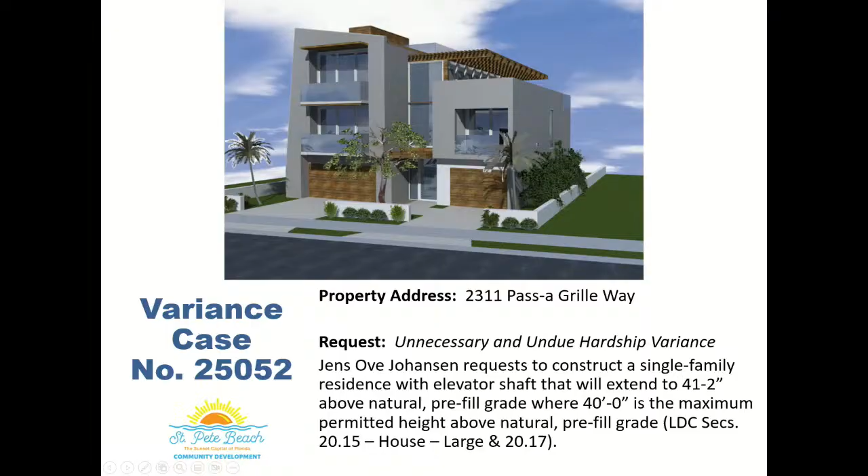Okay, thank you. Good afternoon, Brandon Berry, planner. Pull up the PowerPoint. This is variance case 25052 for the property address of 2311 Pass-A-Grille Way. It is an unnecessary and undue hardship variance. Jens Johansen, the owner, requests to construct a single-family residence with an elevator shaft that will extend to 41 feet, 2 inches above natural pre-fill grade, where 40 feet is the maximum permitted height above natural pre-fill grade. This is a variance from Land Development Code sections 20.15 house large standards and 20.17. Here's a listing of exhibits.

Here's an aerial of the property. It's located at the southern end of a residential strip, just north of the St. Pete Yacht Club. The parcel to the south previously contained a residence back in 2018 or 2019. It was demolished and became an extension of the parking lot for the St. Pete Yacht Club.

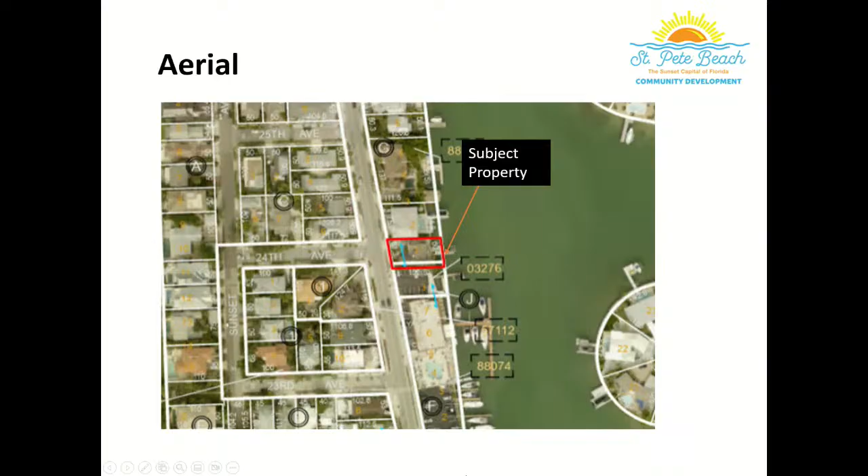The property has a zoning of RU2 PAG. This is a detached single-family residential zoning, which is what the applicant is proposing. They're not seeking any variance to the use standards. It is just north of the institutional district.

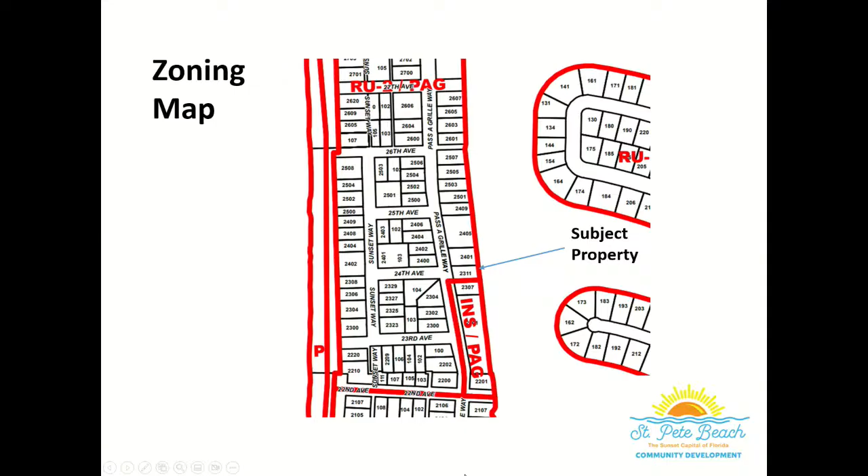Going into details on this request, and I'll show this in more detail on the elevation, the applicant is not requesting a variance to the height of the primary roof line of the residence. They're seeking a variance to add fill to the lot and allow for the overall height of the residence, based on pre-fill measurements, to exceed the allowable height for the elevator shaft overrun.

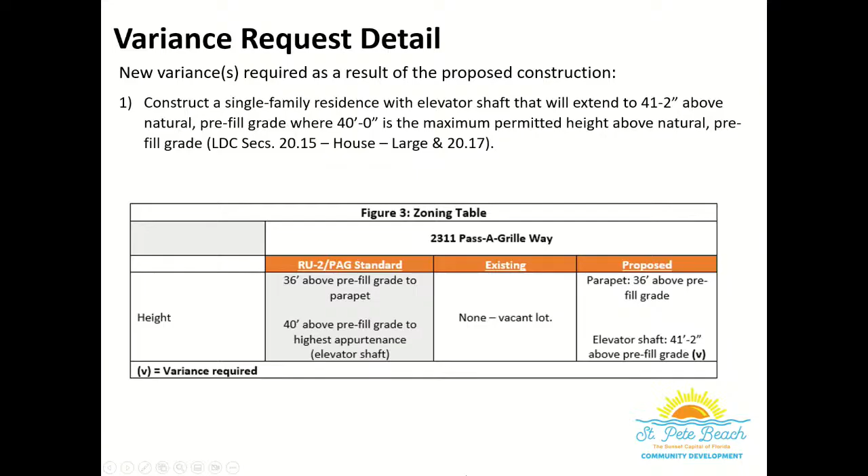That'll be more clear when I show the elevation. They're not seeking any kind of variance to the overall allowable height of the home, even measured from pre-fill grade. It does meet the required measurement. It is only an elevator shaft overrun of 1 foot 2 inches that they are seeking this variance to.

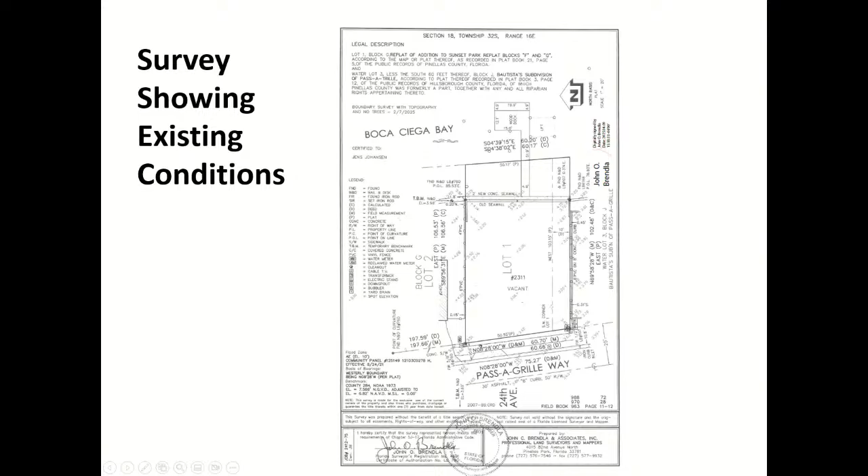Here's a survey showing existing conditions. This is associated with the new residence. You can see the existing lot grade and the existing condition of the lot on the screen.

Here's a rendering showing the front elevation. This was shared with the Historic Preservation Board last year. It did go through the required design review. The applicant has made a few minor modifications to address staff comments and other comments that were shared at that meeting.

From the existing grade prior to fill, this home does meet the required height. However, because they are adding in that additional 1 foot and 1/3, the elevator shaft enclosure is now exceeding that measurement that would be allowed by 1 foot 2 inches. So only for the elevator shaft, they are seeking a variance relative to the pre-established grade.

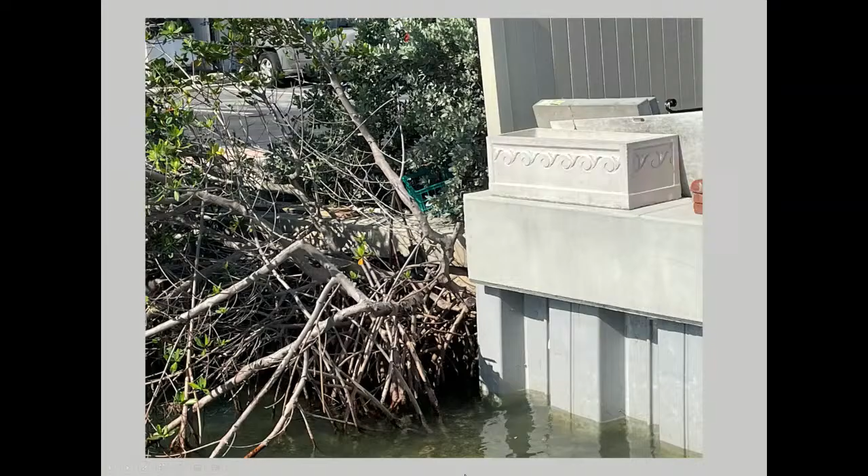To summarize staff findings, as I mentioned before, only the elevator shaft overrun requires a variance. The primary home's roof, the top of the parapet, does comply with the grade change proposed. So even with that 1 foot 2 inch difference taken into account, it does still comply with the maximum height for the lot based on the pre-fill grade.

The applicant has graded their lot to 6 foot NAVD 88 to allow for adequate lot drainage relative to the new code compliant seawall, which, as I mentioned before, is established at 5 feet. This is a unique circumstance. It's one of the first code compliant seawalls along Pass-A-Grille Way and one of the first to be established prior to new development.

A recommended slope of 1 to 2% across the lot to provide adequate drainage on site does justify the 6 foot NAVD 88 measurement of the lot grade relative to the 5 foot seawall. So looking at the grade change across the site with a 1 to 2% grade differential across the site, that does justify a 6-foot grade height.

The applicant is not building a taller home from grade than what would be permitted if they did not grade up the lot to compensate for the seawall. The grade change causes the need for this variance. If they had built this same home at the same height at 4.67 feet, as was the prior established grade, they would not need any variances at all.

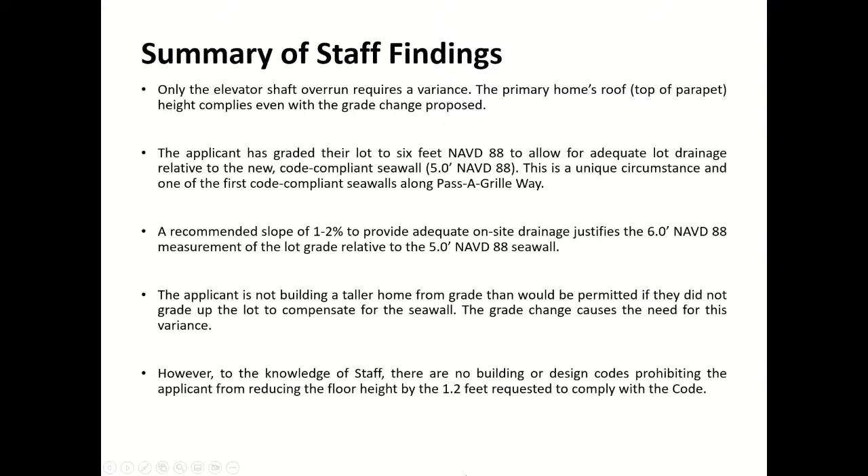The applicant should be prepared to provide their own testimony and respond to staff comments on whether the elevator shaft overrun is the minimum necessary to meet rooftop access requirements, and/or state the need for the floor height of the living or ground floor level. The applicant should also provide testimony on any alternative plans developed should the variance not be granted.

Effectively, how would they develop the home should this variance not be granted today? Staff has not proposed any conditions. There are motion options to approve the case as proposed, to deny the case, or to continue the case to a date certain if more information is needed. We'd be happy to take any questions. The owner and the applicant are present.

I have no questions. I have a question. Do elevators come in standard sizes, or are they custom made for each house? I believe this is custom made for the house, but the applicant has stated there is a minimum overrun of the elevator shaft relative to where they established the top level that would require that overrun.

But they can confirm that. Any other questions? Brandon, I've got a question for you. So just with an eye toward not having this come back as more seawalls get fixed, can you explain to me the height current limitation, what is the datum for that?

And then is that datum, why isn't that different? Does it need to be changed for the future based on the newer seawall height? Because everything's going to get backfilled as the seawall heights come up for all the lots. So the impact is going to be largely on those developments that are built to the absolute maximum height allowed in this district.

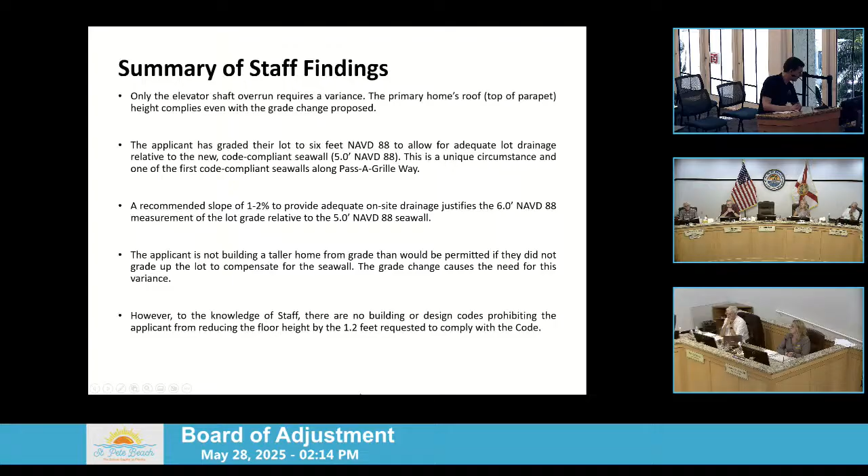Brandon, can you pull up that proposed front elevation page? I know it's really small, but when I was looking at it in the packet, does it show the garage level is 8, the next living level is 9, and the highest living level is 10? Correct. The highest living level is 10, the level below that is 9, and the level below that is 8, correct?

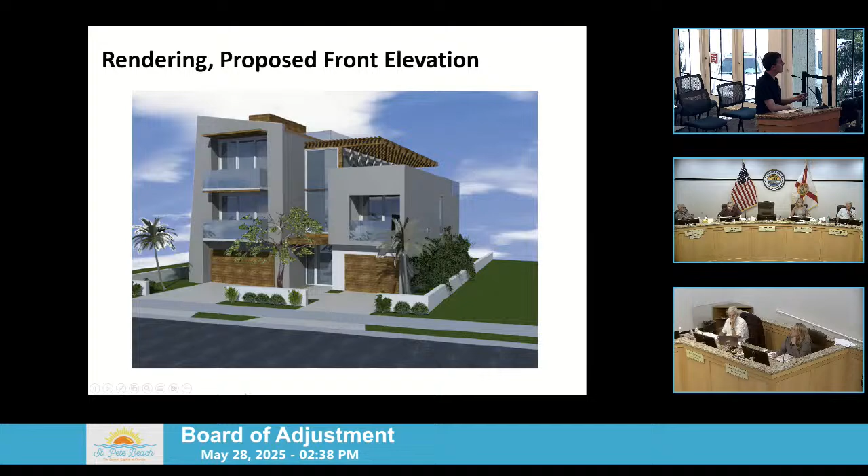So as I look at it, the left side of that, is the roof, that, whatever that is on top, is that sort of slanting down or up? Correct, that's a parapet. That's part of the roof design, but that portion of the structure complies with the parapet maximum height, even with the 14 inches of difference. So that is compliant, they're not asking for a variance for that.

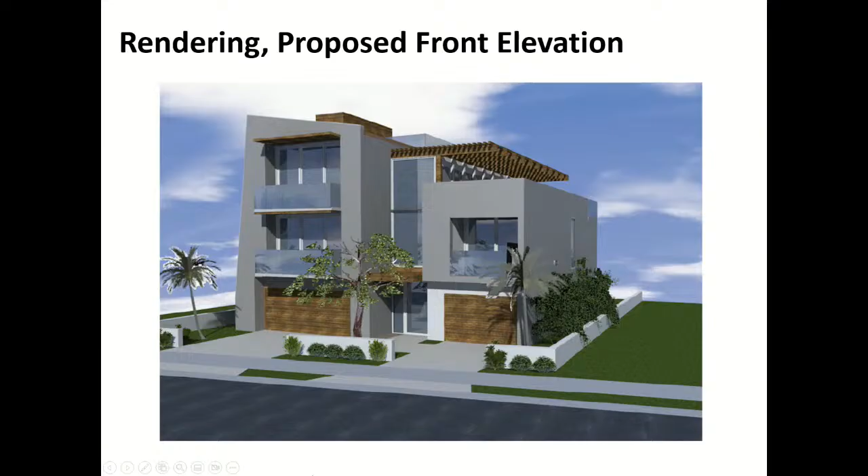I understand that. I'm wondering if that went straight across rather than going up, would that change where the elevator needs to go? I don't believe so, because the top of the roof is staying the same, flat. It's flat, yes. Show that other picture that's not as pretty, granted, but you can see, I think, here, can you point out on this?

It says parapet wall where that slanting roof line is. You can see the dash line below it, that is the roof level, and then you have a glass railing around. See the green section at the top? That's the part, that's the challenge. Yeah, I know. Okay, I know. So the parapet's quite a bit different in terms of its peak.

Well, what should we do? So everyone is going to have this problem over time, every house that gets built new, because seawall heights will be higher, so the old yard will be lower. So raising the seawall is definitely lowering ceiling heights in the future.

Yeah, if you consider a 9-foot ceiling is the problem. I think it's pretty. Unlike you, I have 8-foot ceilings. I love my 9-foot ceilings, but I don't know. Would you like 10-foot ceilings? I don't think that's the point, but sure. 12-foot is great too.

I think it's about location and how we are a community, and the kind of homes we build impact what everybody else that lives around you sees.

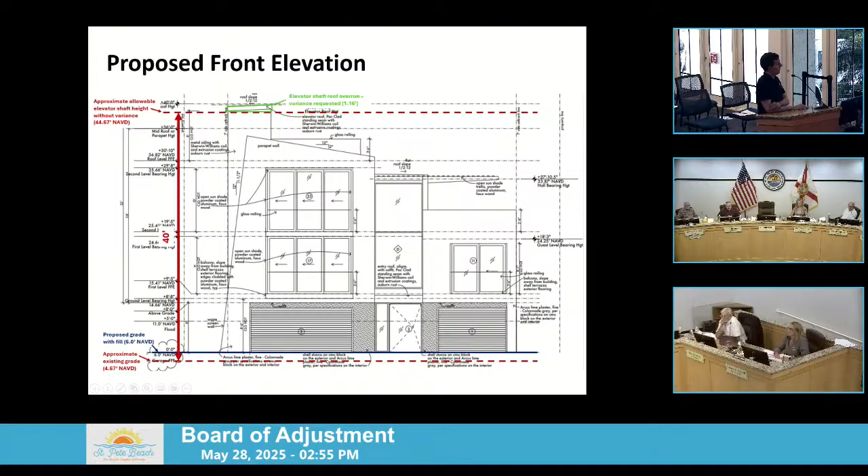So if the elevator is going to open on the roof, then there's going to have to be a fence or something around the roof. Is that still below the height limit? Yes, so that glass railing, it's a little hard to read on this slide. It's really hard to tell from looking at this, that's why I'm asking. That is regulation, and that will meet the requirement based on the building code.

As the applicant mentioned, these plans are approved. Oh, I see, that's building code as well, that goes up higher on one side and the glass goes over there. Correct, it's a 3-foot 6-inch railing across the seating area. Okay, that explains the difference in the slope, that's why I was confused.

Brandon, can you pull up that slide 6 of 13 from the 2505 certificate of completeness and submittal documents? Can you show that on the screen? No, we don't have that on the PowerPoint, it's not in the PowerPoint, it's only in the packet. If you go to the third item in the packet, 6 of 13. We don't have access to put it up. I know, but they can look at it on their screens or print it out. That shows you the glass wall, the heights, the dimensions, and it shows the two elevator doors opening onto the roof.

Can I see those? Are you thinking about this one? Yeah, that's the one. Can you show it to them? What page was that? It's helpful to have old school paper copies. Oh, I see, Kinko's loves you. That makes it a lot easier to understand. Yeah, I don't have that page number, I use it a different way here from the meeting's agenda.

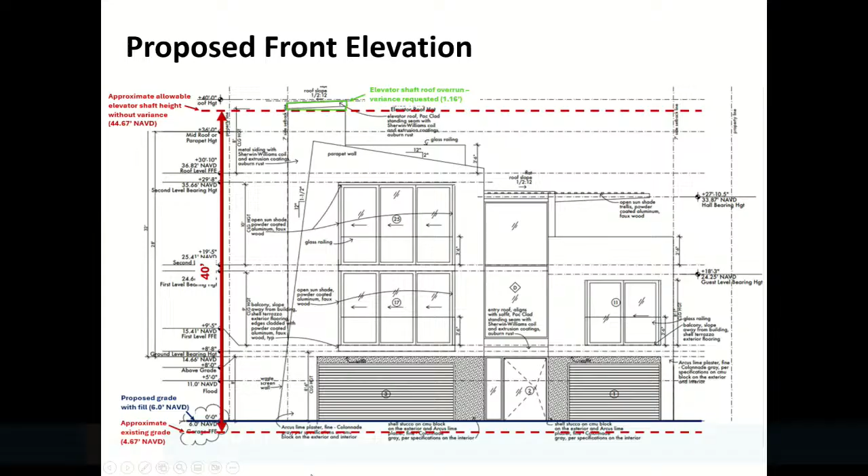Well then, do we want to end the discussion? Does anyone want to make a hardship motion? Because of his family and they need the elevator, but you know what, he knows that going in.

Okay, well if we say no, then what happens? Back to the drawing board. Is that a change? Then you make the edits to reduce it by 14 inches, as you said. Very expensive though. What do you think?

Financial hardship's not supposed to be one of the criteria if you look at the staff report. I think it's number 5.

Making a motion then, Dan? I make a motion that, based on the evidence, the board deny case 25055, because of what I've heard here today. Second.

Take a roll call? I'm sorry, who seconded? I did. Okay, thank you. Member Small? Yes. Member Causey? Yes. Member Corr? Yes. Vice Chair Garshaw? Yes. Motion carries. Okay, thank you.

Okay, next up we have case number 25052, 100 Pass-A-Grille Way. Brandon, pull the PowerPoint back up, please. So this is for the property at 100 Pass-A-Grille Way.

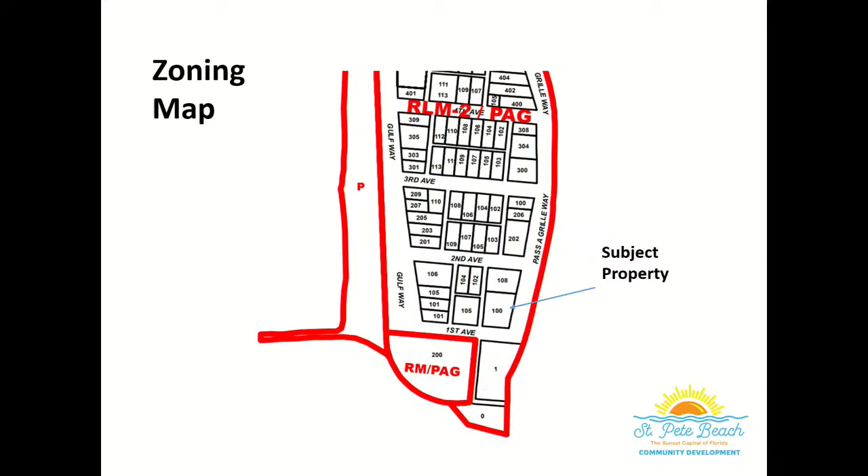It has over time been converted to apartments. The project proposed is for the northeastern building, as well as the 2 buildings on the south side of the property. The structure at the northwest side would be retained and restored, with some remodeling on the stairs at the southern side, but it would remain a 3-story residential structure. There would be reconstruction of the structure to the northeast, as well as the 2 structures to the south, which are joined by a breezeway.

The applicant is seeking to redevelop the existing 1-story, 500 square foot floor area units contained in 3 of the 4 buildings and properties, so that would not be affecting the northwestern structure. With a ground floor of 500 square feet floor area with 450 developed square feet between walls, to be used for parking for units 1 and 2 at the southwest corner of the property, and to be used for screen porches for units 3 through 6 at the eastern side of the property. Those would be the 2 eastern buildings.

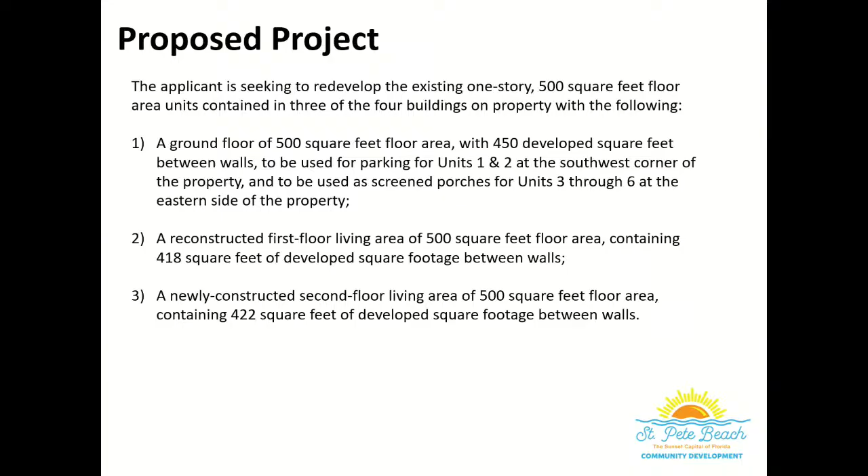This would also provide for a reconstructed first floor living area of 500 square feet floor area containing 418 square feet of developed square footage between walls, and a newly constructed second floor living area of 500 square feet floor area containing 422 square feet of developed square footage between walls.

There is a walkway along the rear of the structures that is proposed. That is not enclosed space. It is a walkway to access the upper levels of the structure. There is a trellis proposed as an entryway point on the eastern side between the 2 buildings, as well as some stairs.

Like I mentioned, the footprints of the structures are not getting larger. It's the floor area of the structures being 2 living levels over parking and porch area that is increasing and necessitating the need for the additional developed square footage.

The request would be for relief of the proposed construction of a second floor addition, which includes a 9-foot 2-inch by 17-foot second floor roofed rear deck area with proposed rear yard setback of 14 foot, 10 and a half inches where 20 feet is required.

Going through the individual requirements, existing is 475 existing developed square feet per unit. Proposed is 1290 per unit. That would include a ground floor, again to be used for parking, storage, and porches, 450 square feet, a first living floor of 418 square feet, and a second living floor of 422 square feet.

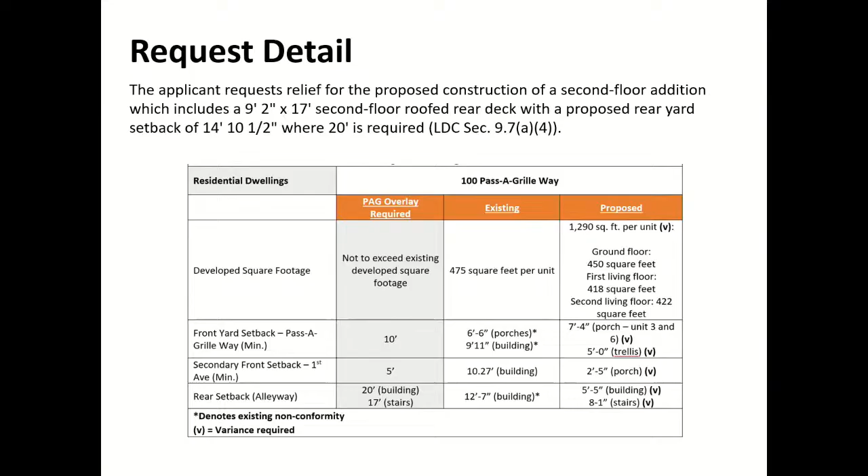This did go to technical review committee as is required for any multifamily project. They met on May 7th to discuss this request. Comments were shared primarily by zoning related to the subject scope, including requests for additional narrative support, detailed floor plans, and a summary of applicant commitments from the Historic Preservation Board design review, design modification potential, and consideration for relocating one or more of the dwellings to Pass-A-Grille Park to replace the significantly damaged Shuffleboard Court Clubhouse.

Some of these items were provided to staff. We did receive revised plans. We also received a revised narrative. Other preliminary comments were shared regarding requirements for obtaining a site plan should these variances be approved. So this would move on to site plan were these variances to be approved, or should the applicants just seek to redevelop without variances.

The Historic Board also reviewed this case on May 1st. Concerns were expressed regarding the compatibility of the structure, it's proposed developed square footage, with the Pass-A-Grille Overlay District. The Historic Preservation Board has in their purview not variance requests, but the compatibility of structures. There were concerns that granting variances on a blank slate would have an adverse impact on the compatibility.

I did want to say that we did receive multiple letters. We received 9 letters: 4 were in support, 5 were in opposition. 3 of the letters that were received in support were received just very shortly before this meeting. If I can just say that the 3 that were received are really only 2, because one of them is a husband and wife, and the other one is the person involved in building it who has a financial interest in it.

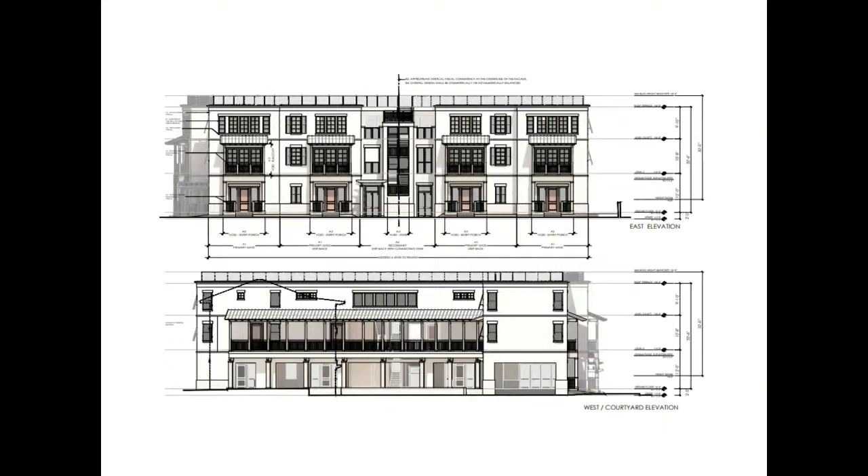It is a 3-story structure, as mentioned before. The ground floor would be used for units 1 and 2 for parking, as well as the existing northwestern building. It is currently used for parking and would continue to be used that way. For those units that face Pass-A-Grille Way, that would be a porch entry to the residence.

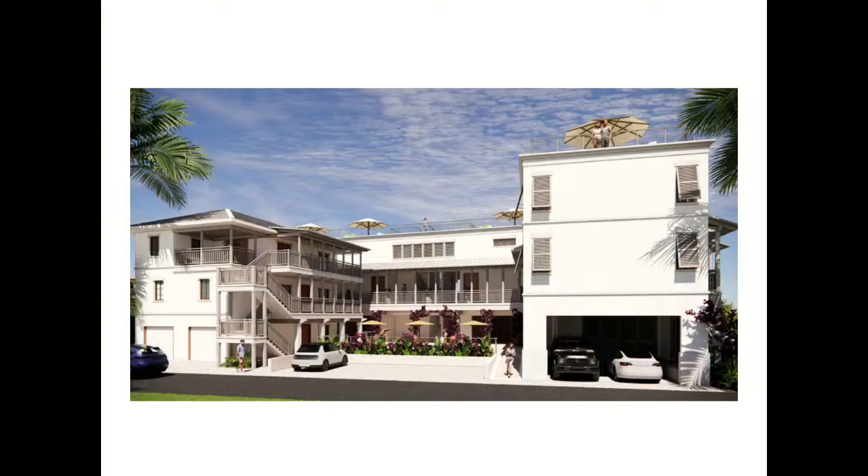And you can see here the east and the west elevations. Here's some renderings. This is looking from Pass-A-Grille Way. And then from the alleyway, looking toward the courtyard.

So to summarize these findings, again, there are 2 encompassing umbrella requests for encroachment as well as for the developed square footage of the structure. There are 7 individual items for action, which I'll share on the next slide.

Staff accepts the applicant justification for the setback encroachments, except for the southern porch request. The request generally preserves or decreases the encroachments of the existing building, which is reasonably expected for reestablishment of a development as permitted by code. What's unique to the Pass-A-Grille overlay is that the overlay allows for reconstruction of developments at their existing density.

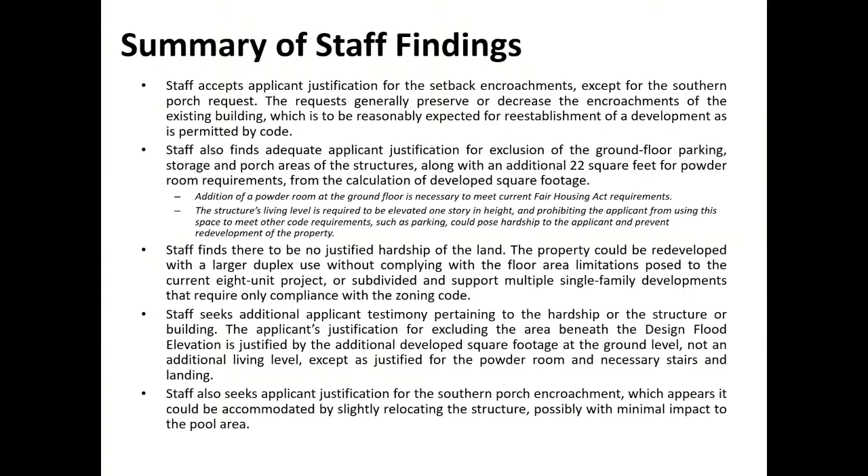The applicant should be prepared to provide their own testimony and respond to the following 2 staff comments. Staff requests testimony to support whether the building could be relocated further interior to the lot, as just stated, and justification for how the additional living square footage of 223 square feet, inclusive of the stairs, in a 2 living level development, or 343 square feet if the development remains 1 level, is necessary to allow for reasonable minimum use of the structure when reconstructed.

Or how the standard presents a specific hardship of the land, which I don't feel was advanced through the application, when there are other options available for use of the property in addition to reconstruction of the existing dwelling units.

Should the applicant provide additional information to satisfy the board that substantial and competent evidence has been provided and look favorably on the application on the relief request, the board may wish to consider the following conditions. The interior ground floor developed square footage provided under this request shall not exceed the footprint of the living level above, or 450 square feet, whichever is larger.

The facade features, footprint, scale massing, attached accessory features, and general color schemes of the primary structures as presented in renderings and floor plans attached to this request shall be preserved, except that minimum alteration may be made necessary to comply with conditions or approval of these variances or requirements of the Florida Building Code or National Fire Prevention Code. That would not be an additional variance to the developed square footage that is under consideration. That is only changing the actual look or the massing of the building.

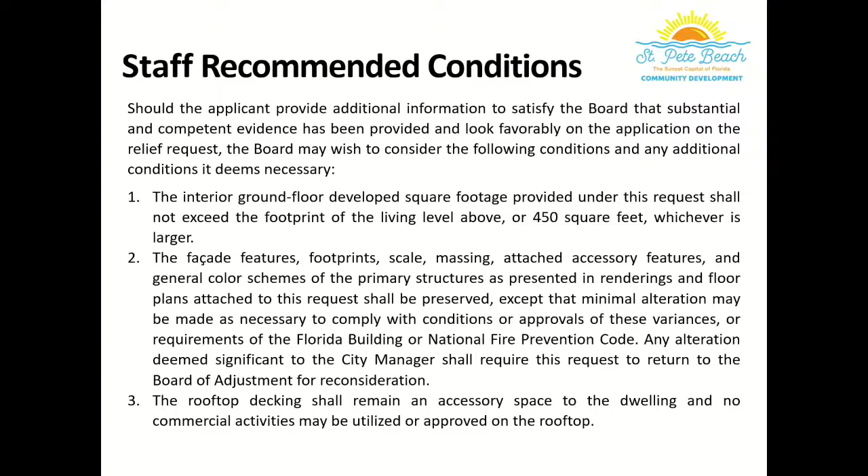Any alteration deemed significant to the city manager shall require this request to return to the Board of Adjustment for reconsideration. And finally, condition 3, which I did speak with the applicant about previously, the rooftop decking shall remain an accessory space to the dwelling. No commercial activities may be utilized or approved on the rooftop, and that is something we discussed and they consented to for condition number 3.

So again, there are 7 options under consideration today. Just going through the 7 quickly. The first is the encroachment of porches on units 3 and 6 to 7 feet 4 inches from the front property line along Pass-A-Grille Way, where 10 feet is required.

Permit the encroachment of a trellis to 5 feet from the front property line along Pass-A-Grille Way, where 10 feet is required. Permit the encroachment of a porch on unit 2, so that's moving to the south, First Avenue facing side of the property, to 2 feet 5 inches from the secondary front property line, where 5 feet is required. Permit the encroachment of the redeveloped Unit 1 and 2 building to 5 feet 5 inches from the rear alleyway property line.

That would be on the west side, opposite Pass-A-Grille Way, where 20 feet is required. Permit the reconstructed Units 7 and 8 building stairs and decking to encroach to 8 feet 1 inches from the rear alleyway property line opposite Pass-A-Grille Way, where 17 feet is required. Those conclude the 5 required encroachment setback variances.

Item 6 is to permit the ground floor of each unit not to exceed 500 square feet in floor area, or 450 square feet in developed area between walls to be excluded from the calculation of developed square footage. Permit the living levels of each unit not to exceed 450 square feet in floor area, or 343 square feet in developed area between walls to be excluded from the calculation of developed square footage.

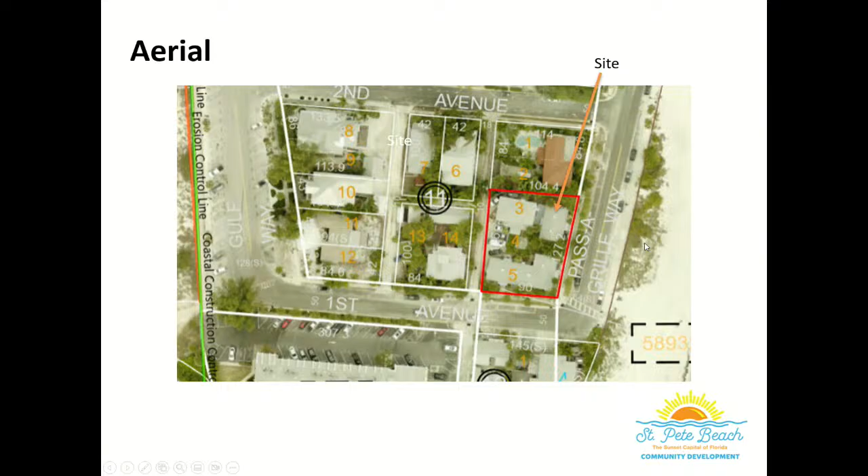Yes, and then between the 2 buildings, between the 2 gray buildings where you can see the stairs just to the east of the pool and courtyard, you can see past the dashed line there's an element that's a walkway out to the sidewalk. Do you see that there between the 2 buildings? I want to make sure I know what you're referring to. It's this right here. Okay, this is a trellis, and I'll go back to the renderings to show you where that is. That's extending outside the required setback. You can see that trellis, that is an encroachment.

Moving to the south side of the building, with one of the units, you can see the southwestern side of the property. You can use your mouse and move us along with you. Is that helpful for you guys too?

Yeah, okay. So this is the porch that encroaches to 2 feet 5 inches where 5 feet is required. So that is a variance into the First Avenue required 5-foot setback.

This building currently is set within the required setback, but during reconstruction they are required to comply with the setback. That is 20 feet. They're requesting a 5.5-foot setback for that building to be reconstructed.

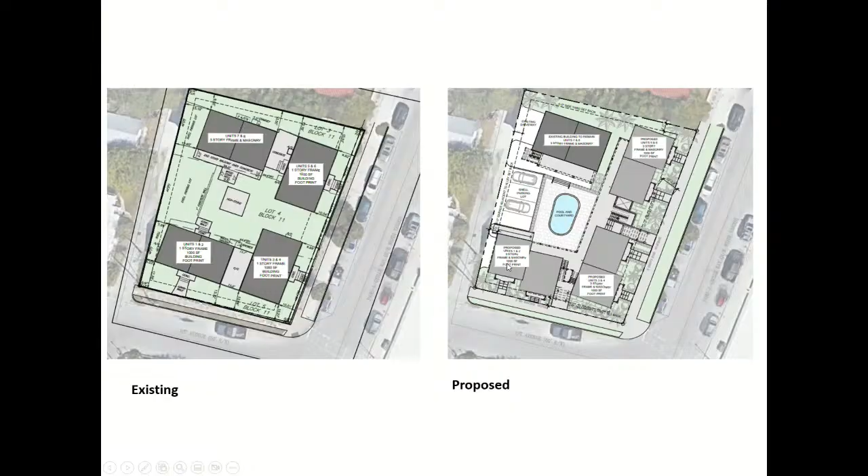And if we could pull up the overhead, it might be easier to show on the overhead. Love the red, clear. Thought that might be helpful.

So that is that porch encroachment I was showing into the First Avenue setback. This is the building encroachment into the 20-foot required rear setback.

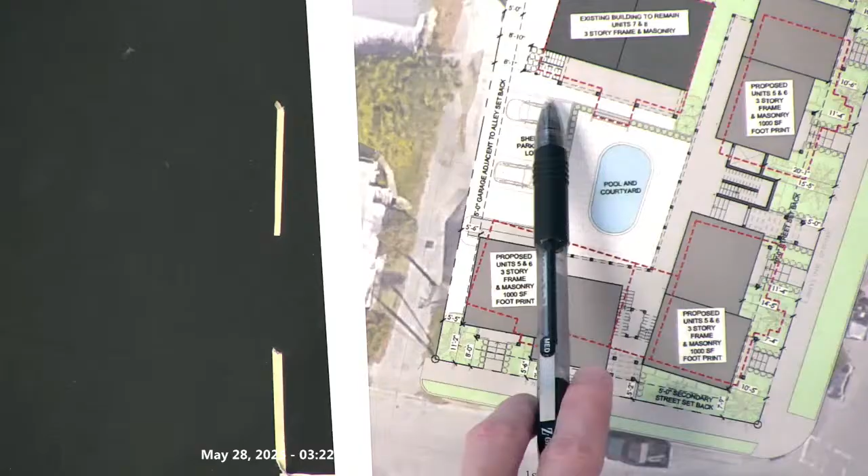And then looking at the last encroachment, that would be for these stairs here. They are being reconstructed and encroaching further than they are today. That is a required 17-foot rear setback. They're proposing 8 feet 1 inch. So that's the 5 setback variances that are being requested.

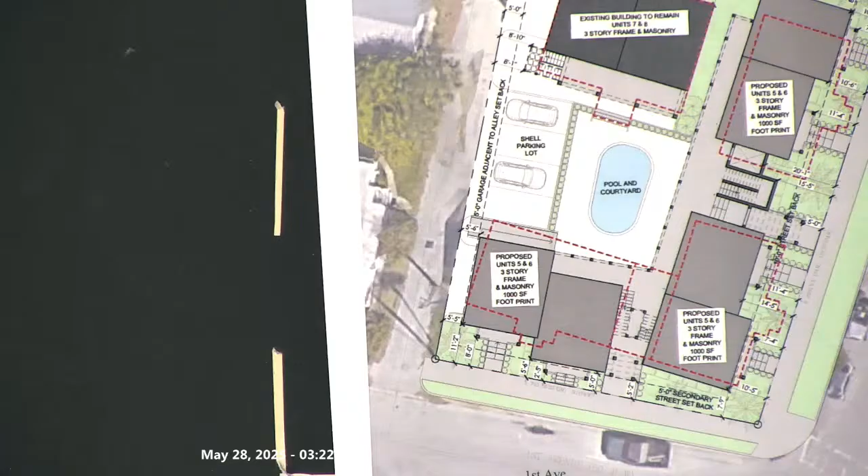Thank you, and we could just keep looking at that for a minute. Do you guys have questions about this? Yeah, I did. On the staff findings, the 4th point, if you could just unpack that a little bit. Why is there the 500 limit, or 450, relative to being able to just redevelop the site as duplexes where you wouldn't have the limit?

So that is an option. When the city created and expanded the Pass-A-Grille overlay back in 2017, they provided for developments that are non-conforming to the number of units currently allowed on the property to be redeveloped with that same number of units. The limitation placed on those developments, and the variance the applicant is seeking, is to redevelop with a greater developed square footage than what is currently on the property. That is the limitation imposed by the code.

They do have an option to redevelop the property with a duplex. They could look to split the lots of the property, because there are multiple platted lots underlying this existing parcel, and they would be able to redevelop single-family homes. Those would not be held to a living square footage or developed square footage limitation. It's keeping those 8 units in redevelopment that imposes that developed square footage limit.

Because of the density, because of the 8? Because of the density, the number 8, exactly. They would be allowed, if they were to redevelop this as one parcel, to have a duplex that would only be limited by height, setback, and lot coverage. They would not be limited by the developed square footage of the existing development. The same would be the case if they were to split the parcels. They could develop single-family homes built relative to the setbacks, the height, and the lot coverage, but they would not be limited to the developed square footage.

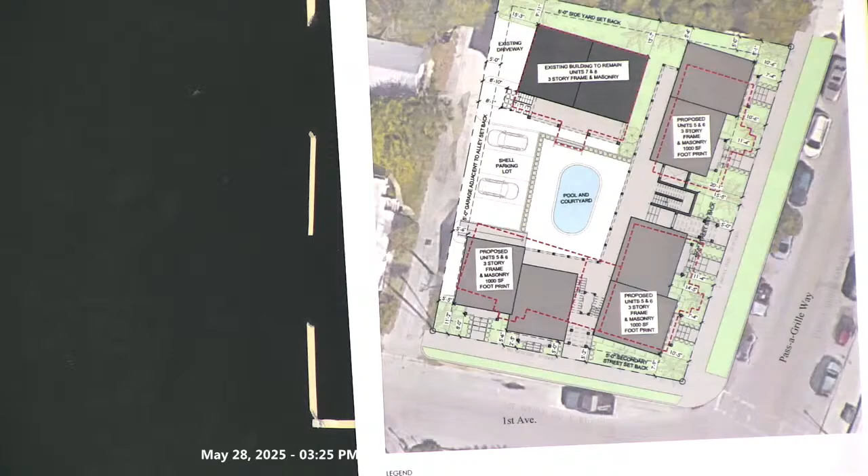You can keep that overhead handy, Brandon, if we need it later. Could you state your name and address?

Good afternoon, Madam Chair. Brian Aungst, 625 Court Street, Macfarlane, Ferguson, and McMullen, here on behalf of the applicant. I do have some handouts I wanted to provide, old school hard copies if that's okay, of the PowerPoint. This is also a revised application that includes an updated narrative in response to DRC comments. We've actually eliminated the requested setback encroachment for the southern porch - it's out, completely tossed. So I wanted to provide you this so you have the latest and greatest, and we can go through it together with all the information from the applicant.

Okay. Are there significant changes here that would require some thought ahead of time, Kristen? Before we would vote, is this going to require a continuance?

I don't think there's any significant changes, sir, other than reducing the intensity of the project and reducing the requested variances. So what's before you now is less intense and less requests than what Mr. Berry just presented. And of course, if you all want to move for a continuance after the presentation, that's absolutely your right, and we'd be happy to provide more information and come back.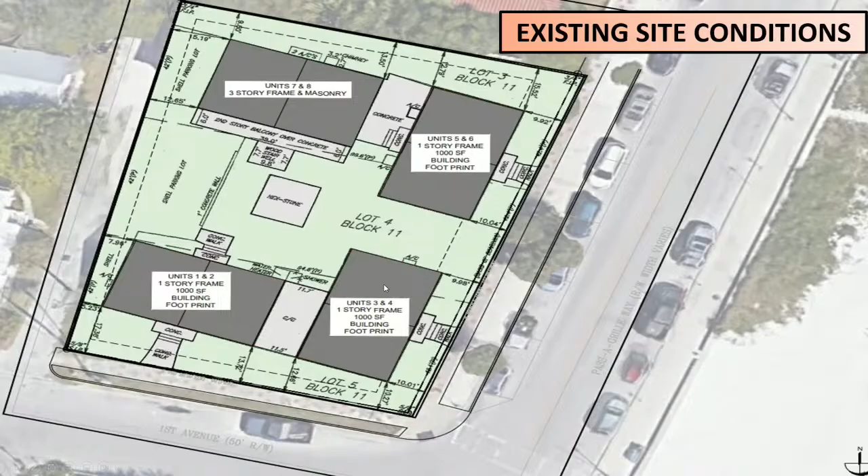But I think the images that are really critical for this request are where we started on this project. And the first demand, or first, looking at the Pass-a-Grille code, was to maintain the character - and character is architecture, is look. It's also, because my hands are - are you in control? Yes, I'm in, I'll let you drive this. Okay, I'm sorry, two drivers is not... no.

As Mr. Angst said, this is a multifamily courtyard-style development, and that's what we were tasked to retain. Part of that is to maintain the footprint size, and that's where the 500 came from—each of the existing red buildings was 1,000 square feet divided into two.

There is a covered entry between these two buildings, so that's part of the character, and also how they approach the street with their porches.

So then we have to take them up. As Mr. Angst said, initially we have to take them up—we can't use the ground floor. I just want to make sure everyone's clear: the red is what's existing, and the gray is what's proposed. I don't want there to be confusion thinking that red looks really close to the sidewalk—that's what's there currently. The gray is what we're proposing to put.

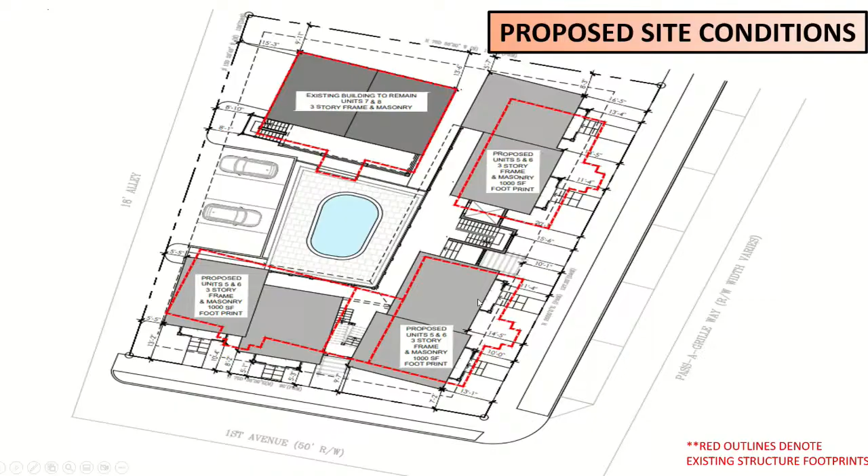I'll go through that, but what I want to go through is—can I zoom in, or does that zoom? I don't think you can zoom. Okay, so what we're looking at here is a typical unit, and we've since looked at this.

We come up to the living area—this is the existing, and the proposed is outlined in blue here. What we're looking at is we enter the unit. Because these are two-story units, we have to have at least a usable powder room on the ground floor in case a guest needs to use the facilities. Where this is one story, we would actually have to have a larger bathroom to meet fair housing, which would further reduce it.

Right now, if you look at the living area, it's 366 square feet; structure is 82 square feet because we have to have floodproof and windproof construction. Vertical circulation—we're choosing to go upstairs, so that's the stairs. In normal calculations we'd only count one of the stairs and wouldn't count the upstairs. Then the mechanical and powder room area is 36. So the total floor area is the 500, but the living area is 366.

Second floor, similar thing—we take out the square footage for the stair. These also had window units, so we have to have normal, everyday compliant AC units and all that, so we need the mechanical room for that. That takes up space too. The living area there is 340 square feet because we've taken out structure, vertical circulation, and mechanical, and that totals the 1,000.

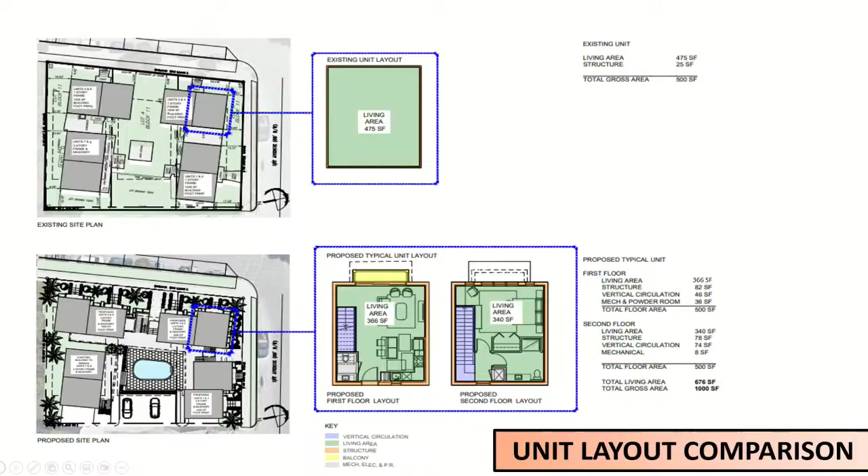We chose, and you can see on the model and on the drawings, to break up the buildings so that we have - and the historic reviewer agreed that we are compatible with the architectural styles and the historicity of the area. That's why we had the steps in the elevations.

So Esteban, I'm sorry, please. That's okay. Have you obviously designed this project, correct? And you are an architect licensed in Florida, right? And you reviewed the variance criteria, yes, the criteria for approval. And in your opinion, has the applicant provided competent substantial evidence to meet the variance criteria? I'm going to do this part.

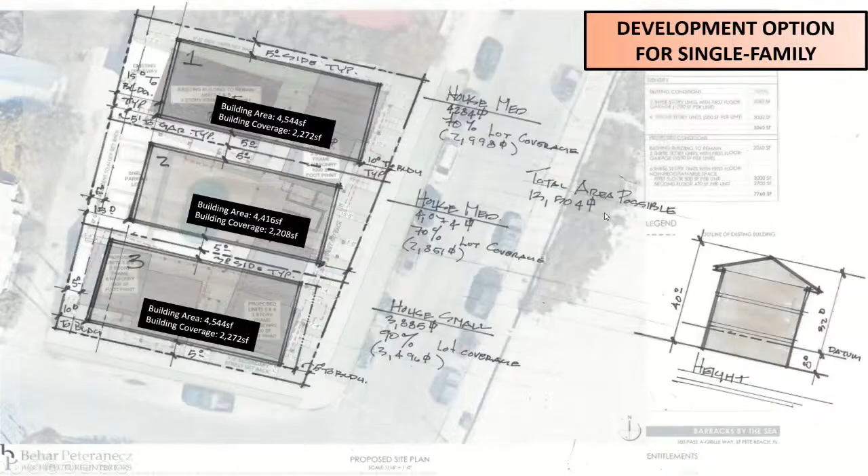Would you do that for part? Yeah, there you go. And you don't have to go through all these, but my question is, have you reviewed all the variance criteria? We have. And in your opinion, has the applicant provided competent substantial evidence to meet the variance criteria for the requested variances? I believe for the variance criteria, yes.

Thank you. Okay, and he's still here for questions. I just have to finish my presentation, then you guys take over and we'll be done with our presentation here. So going through the specific - while you were on that line of questioning, though, could you have Esteban elaborate on his yes? Well, let me go through the criteria if that's okay, and then maybe I can ask him to talk about each one. Is that okay?

Okay, and this is also why I provided you with this, because we provide detailed narrative responses that Esteban helped us draft to each of these. So the first one is that special conditions and circumstances exist which are peculiar to the land, structure or building involved and which are not applicable to other land, structures or buildings in the same zoning district. And the issue that we have here is we have 3 multifamily buildings that were built in the 1940s prior to FEMA, so they were not built elevated.

They were not built to fair housing standards. They were not built to ADA standards. The code allows us to rebuild those 8 dwelling units—actually 6, because 2 are in the building that wasn't affected. But the code limits us to the 500 square feet that were non-compliant with federal law, not city law. This isn't really a city code issue; it's a federal law issue involving the flood zone, the Fair Housing Act, and ADA. It's impossible for us to comply with city law to rebuild at 500 square feet on the bottom floor because federal law will not allow the city to permit that, and the building inspectors will not permit it. That's the hardship. The hurricane flooded these units, destroyed these historic structures, and they're gone. We're trying to keep the character of what was there. That's as simple and direct as I can explain it.

So in terms of the minimum variance—did you design this to the minimum variance, and could you explain how and why you meet that criteria? The minimum variance to us was maintaining the footprint and what's actually required to create a usable unit, including the circulation and necessary fair housing items like bathrooms and the kitchen. Right, code. Yeah, code. Okay.

The final criteria is that the requested variance is in harmony with the general intent and purpose of the Comprehensive Plan and Land Development Code. It is not injurious to the neighborhood or otherwise detrimental to public safety and welfare, is compatible with the neighborhood, and will not substantially diminish or impair property values. I think the retention of the courtyard apartment style that's been there is less intense, less square footage, and more in line with the coastal modern design historically in that portion of Pass-a-Grille than the alternative—massive duplexes or massive McMansions. The code encourages these units to be retained, but the challenge becomes the fair housing and federal issues we talked about.

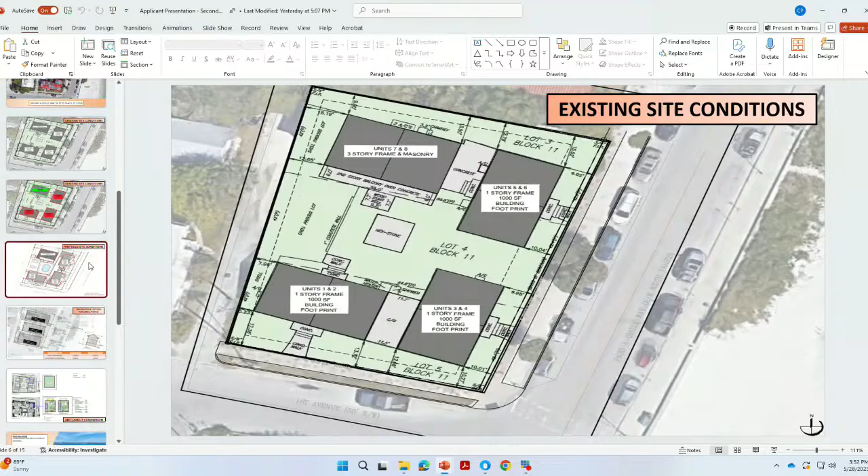I'm going to let Esteban explain what he did, because I did not do it. He's way better than I am to explain that. Because we have 7 and you're requesting 4, so I'm just trying to whittle them through. Right, what you can see here on this drawing, and we did submit this, but obviously not until yesterday at 5.

We pulled this building back, this porch here, back to the 5-foot line as required to meet that setback on that side. The other setbacks, the only one really in front of the existing structures is this trellis in the front. You can see the red line is the existing building; all the other porches and building faces are behind the current building frontages and encroachments. So we're actually making it better.

What was on the existing building that's not going to be torn down? What was this one here? Why did you pull that? What was there that's sticking out? This was where the existing stairs are, and they're in need of repair. So instead of putting it there over the pool area, we thought, let's put it at the end. As with anything else, it's a drawing, it's negotiable.

When you're saying there's no elevators, are these all just... Let me clarify, no, there's an elevator here that goes up to just the second level, and then you enter each unit from that second level. And each of them is going to have an elevator? No, there's one elevator for the entire building, since it's multifamily, so there's one elevator for the 6 units.

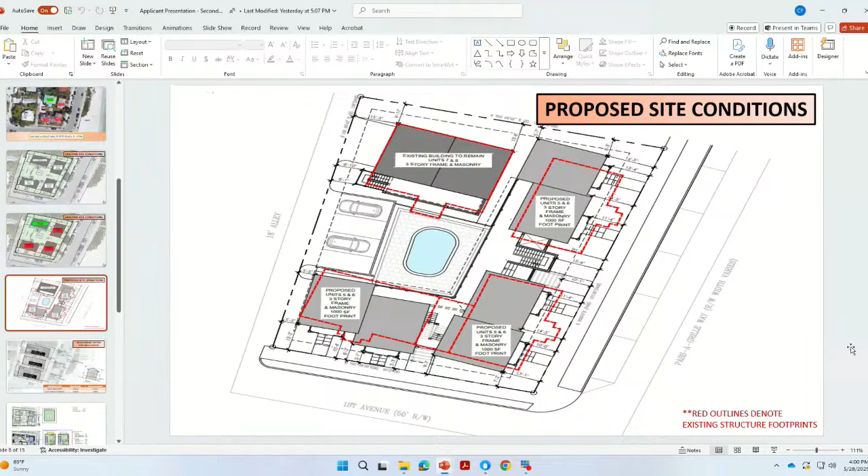Okay, and we don't want to pull this, but the reason we showed the 3 is that we're trying to demonstrate that we're building 8,000 square feet versus 13 or 14 that's possible on the site, and that's not maintaining the character. Our task was to maintain the character of not just the look, but of the use.

So let me ask you this: if you were to just do one single living area, that would mean it wouldn't be on the ground level, it would be elevated. Everything has to be elevated, correct?

But the proposal you've got here has the living area on the ground level? No, not at all. We have to lift it up, and the code counts against us if we use it, and we didn't want to make it look like Cape May stilt houses.

It's for parking and other miscellaneous storage uses on the ground floor, but the first and second floors are the elevated living floors. So all of your proposal is elevated living area? Correct, essentially two stories over parking. Our flood zone DFE is 14 feet, so we're measuring from 8 feet still.

So the reason you can't do one living area is only to maintain the size of the courtyard? Partially, yes. If you shrunk the courtyard, the buildings get closer together. This is three individual buildings, and we wanted to maintain that character—smaller buildings, smaller footprints, with a usable courtyard.

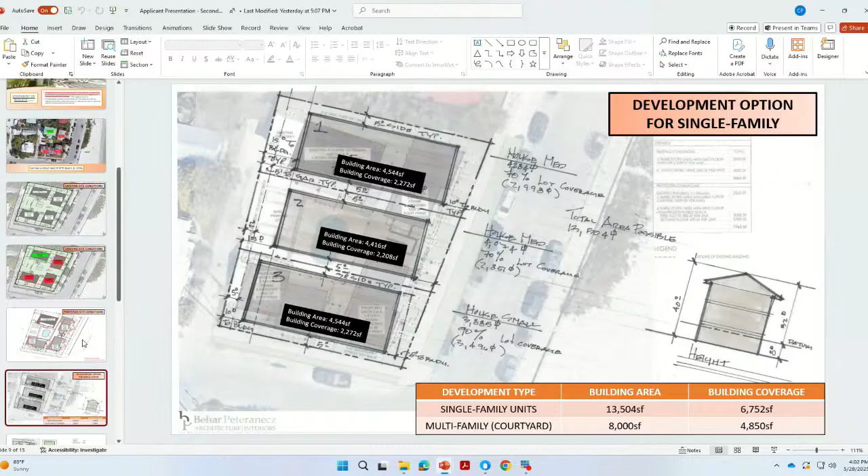If you go to the next slide with the unit sizes—the existing was 475? Well, that's the gross inside, and I'll confess I did not go inside, and that has a small bathroom. So the existing is 475 plus 25 for structure, and the new is 366 plus 340.

706, yeah. So 366 and 340.

I think all these numbers look a little different from what we had previously. I think what we'd want is to make sure staff has an opportunity to review this, and we'd motion to continue, but it would be helpful to have any thoughts on whether they should be able to increase the living area. We can have some conversation about that.

We do have some members of the public here for public comment, who may not be able to make it back next time if they want to speak today. Deputy Clerk, would you call them up?

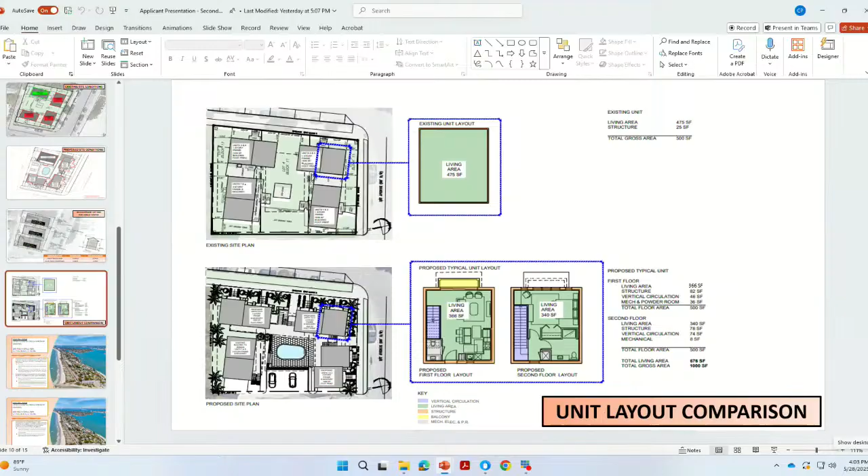Good afternoon, I'm an owner right across the street. Julian Sanchez, 200 First Avenue South, apartment 305. I've owned that unit with my wife and kids for about 5 years. When I stand at my balcony, this property is maybe like 1 o'clock on the hands of a watch.

This is a curveball—they came in last minute and started changing everything, so it's a lot to absorb, and thank you for continuing this for another day. But if you told me I had to pick between what they're proposing and three largish houses, that's kind of part of what Pass-a-Grille looks like. There are some cottages and some nice bigger houses.

I'm okay with that. Another thing is the precedent of granting variances on Pass-a-Grille Way, First Avenue South, or the alley. The Island's End property right next to it also got destroyed. They're going to come in and ask for whatever you give these folks, probably a little more, and I think it's going to change the character of Pass-a-Grille. I think there'll be less density if you build some houses.

Another thing—because that's the dog beach right there, I was there this weekend, and there's a lot of people walking in and around that area, and it's kind of dangerous with people coming around that turn. So increasing density, although what they're proposing might preserve the courtyard character, I think it's going to make it more dangerous by putting more people there.